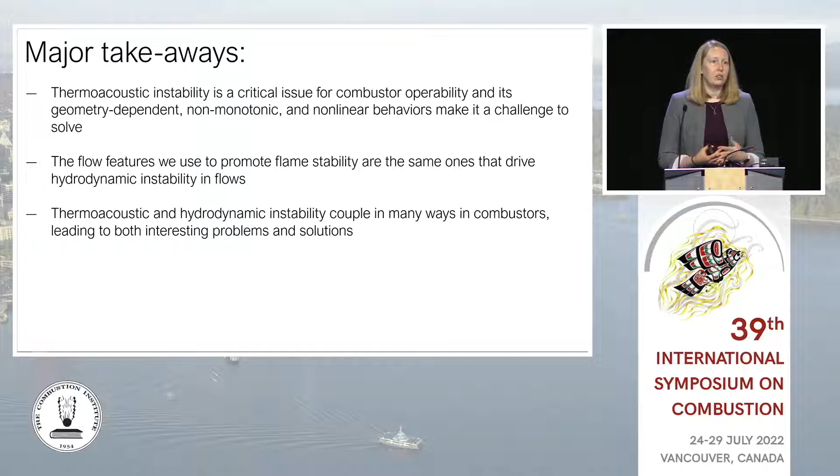And finally, this is a problem that obviously requires deep knowledge of fundamentals, but it also requires a knowledge of the technologies in which these instabilities occur. Thermoacoustics doesn't show up in the wild. It shows up in engines and devices that we have designed. And so knowledge of both the fundamentals and the application is really important.

That said, one of the other things I'll argue towards the end of the talk is that pretty basic theory that's computationally tractable has a real potential to reduce the likelihood of instabilities all the way in the design phase. All right. So let's get started.

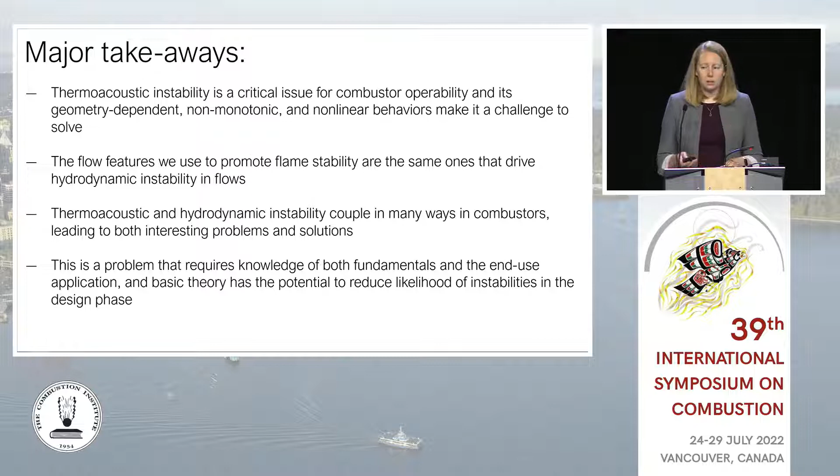So where does thermoacoustic instability occur? Basically, you can get thermoacoustic instability anytime you put a flame in a box. And as combustion engineers, that's what we tend to do, is put flames in chambers. And so this has the potential to occur pretty much anytime.

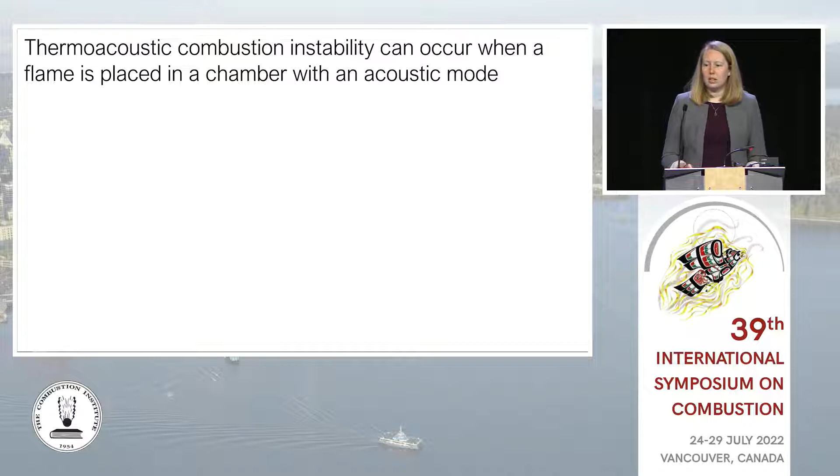So some examples of where we see thermoacoustic instability, probably the most famously is in rocket engines. This is the F1 rocket engine. Five of these were placed on the bottom of the Saturn V rocket that took us to the moon. And it has some famously intense instabilities.

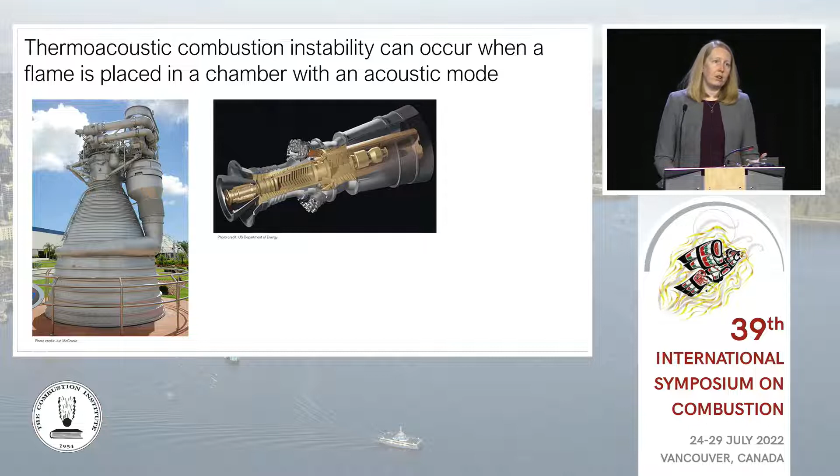Much of the work in thermoacoustics today focuses on low emissions gas turbines. All the tricks that we played to reduce the emissions, particularly the NOx from these engines, made them highly susceptible to thermoacoustic instability. And if you look across the modern literature, it's these two technologies that you'll see a lot of work focused on. However, thermoacoustics shows up in a lot of different places.

And one really interesting place is in big industrial systems, air heaters, package boilers, furnaces. Because these are really high heat rate devices, they can have really intense instabilities. But because they're so large, they tend to be really low frequency, on the order of tens of hertz.

And finally, you don't have to go to large industrial exotic technologies to find a thermoacoustic instability. You could just look in your basement. You can, in fact, get instabilities in gas-fired water heaters. So all the way from the lowly water heater to the mighty F1 engine, we have the potential for thermoacoustic instability, and a lot of the fundamentals that drive these instabilities are the same in this range of technologies.

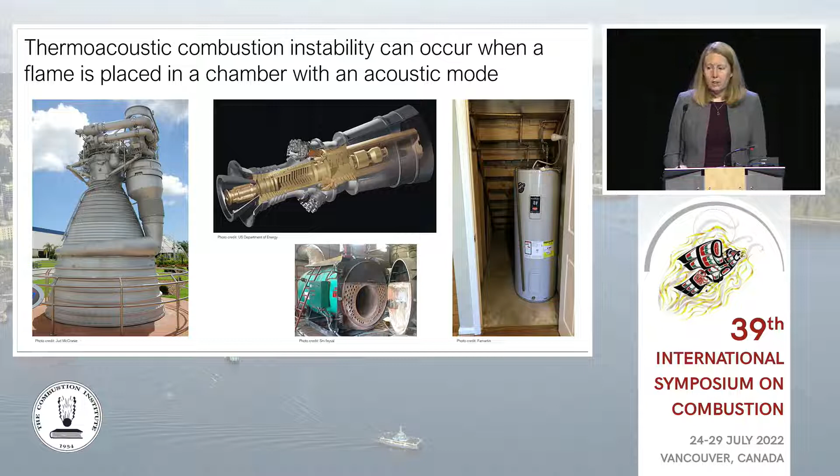So let's quickly talk about those fundamentals, and I have to give a lot of credit to yesterday's speaker for setting me up so well on this. But thermoacoustic instability is driven by a feedback between the heat release rate oscillations from the flame and acoustic oscillations inside the combustor, which include both oscillations in pressure and acoustic velocity. So let's break these down into their constituent pieces.

First, we'll talk about acoustic modes, knowing that many here may not be too familiar with acoustics. I'm going to assume that a combustor is a cylinder. Many of them are. Just as an example here, and as a three-dimensional object, you can get three components of an acoustic mode shape inside that device.

The first is the longitudinal mode, so I'm looking sort of on the side of this combustor, let's say flow's going from bottom to top, and I can get a resonant harmonic oscillation inside that combustor, fluctuations in both acoustic pressure and acoustic velocity as a result, where the fluctuations in both pressure and velocity oscillate in the direction of flow. And those are referred to as longitudinal modes.

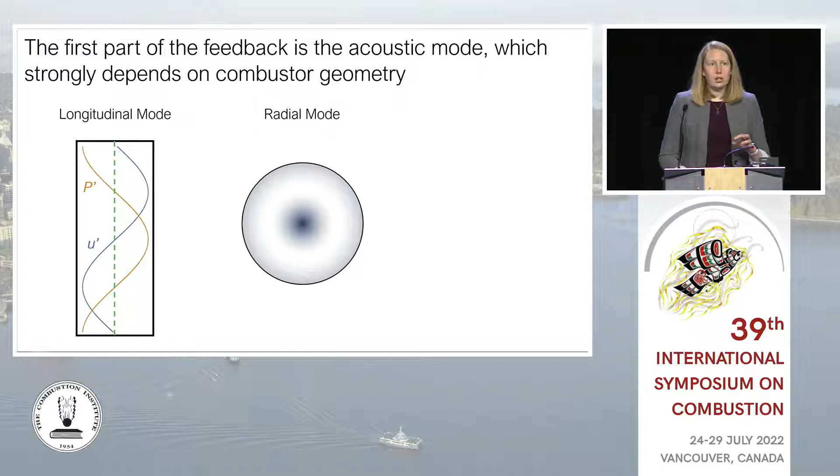If I turn that combustor on its end, I can also get fluctuations in the acoustic properties as a function of radius. We refer to these as radial modes. You can think of like hitting the top of a drum and the oscillations that emanate from there. And then finally, you have azimuthal modes. And so now you have pressure and velocity fluctuations in the theta direction.

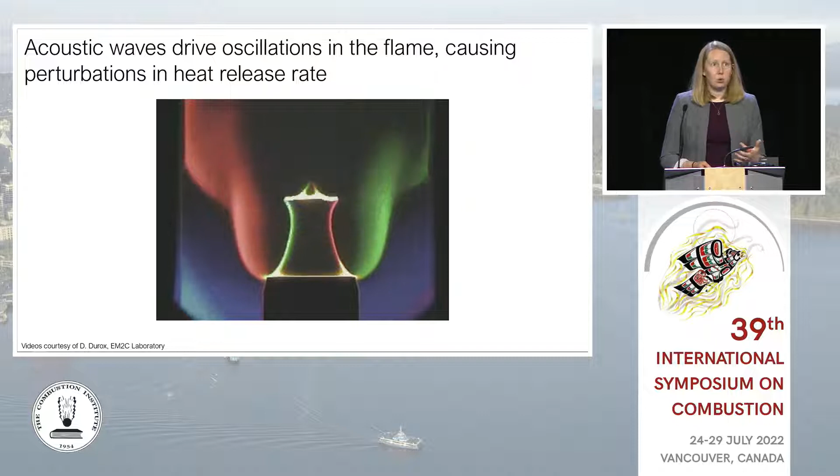The other part of this feedback loop is that flames are actually really sensitive to incoming perturbations. And so the movie that I'm going to show here is from Daniel Durox's EM2C. Here, this is just a laminar Bunsen flame, a high-speed Schlieren video. He's got a speaker at the bottom of the tube and is exciting the flame at 50 hertz. And what you can see is the very large wrinkles on the flame that are excited by the oscillations upstream of the flame that cause significant flame response and, as a result, heat release rate oscillations.

And so now to close the feedback loop, we have acoustic oscillations that can resonate inside the combustor. You have heat release rate oscillations from this highly sensitive flame. And if you think about heat release rate oscillations, this is a periodic expansion and contraction of the gas. This is just compression expansion work, or PdV work, that the flame does on the surrounding fluid. And this work can transfer energy from the flame into the acoustic mode, closing the feedback cycle, such that if all of this is happening relatively in phase, you can get a feedback and an instability.

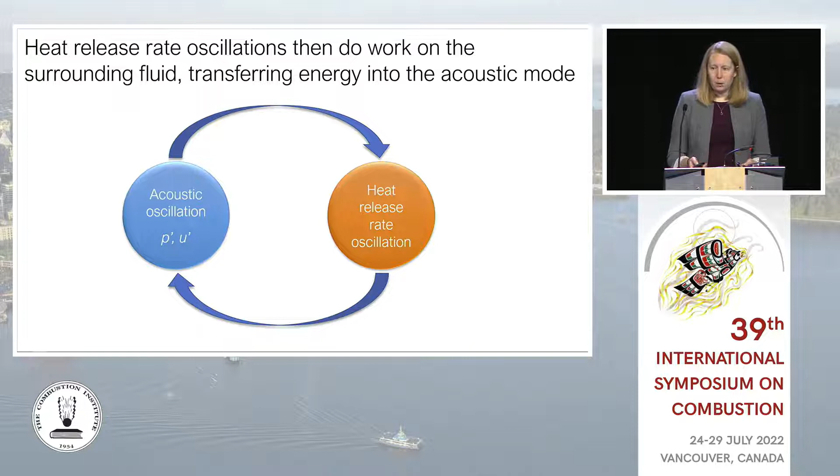Typically, however, there's more going on. And in between the acoustics and the flame heat release rate oscillations is something referred to as a coupling mechanism. In the paper that accompanies this talk, I talk about a whole bunch of different coupling mechanisms. But in this talk, I'm only going to focus on one, which is velocity coupling, or the excitation of the flow field by acoustics that then leads to the flame heat release rate oscillations.

We've known for quite some time that fluid mechanic coupling is really important for thermoacoustic oscillation. This is a picture from a classic study by Rogers and Marble that was published in 1956. This is a bluff body stabilized flame where flow is going from left to right. That triangle is the bluff body that the flame is stabilized on inside a relatively thin channel. And you can see from this Schlieren photograph that the flame is stabilized in the separating shear layer off the back of that bluff body.

They could operate this combustor in an unstable mode. And so this is what it looks like when it's unstable. They referred to this as screeching combustion. We still today refer to this as a screech mode. It's a really great word.

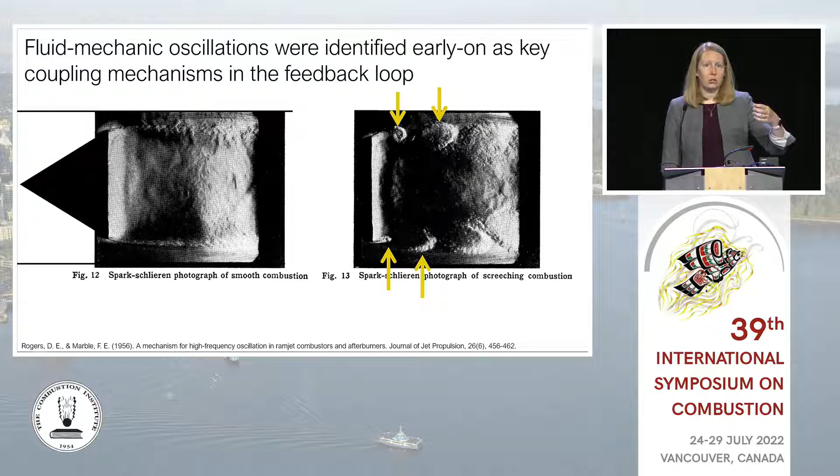And so what you can see from this Schlieren photograph is that there are large fluctuations on the flame that are causing these heat release rate oscillations. Although this isn't a direct velocity measurement, it doesn't take too much creativity to infer that these large oscillations on the flame are coming from vortices that roll up in the separating shear layers that are excited by the acoustics.

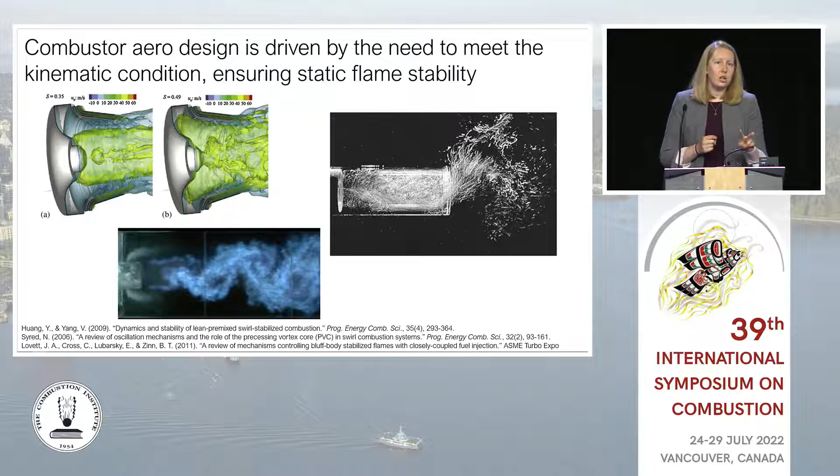And so in order to understand these fluid mechanic coupling mechanisms, we have to think a bit about what the flow field looks like inside a combustor. But combustors look very different for different applications. So here are a number of different examples from authors in the community of really different flow fields. But if you look across combustor technologies and sort of do your eigenvector decomposition of what flow fields look like, there are really two basic flow features that we use to stabilize flames in combustors. And they are shear and recirculation.

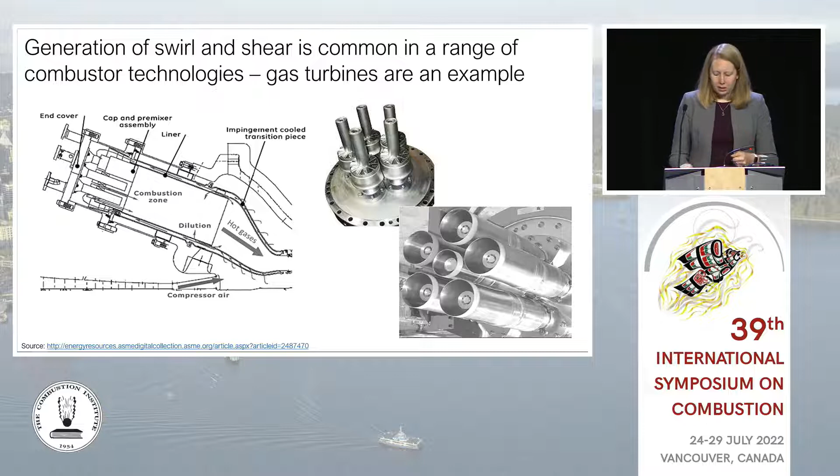The issue is that if you really looked at these pictures before, you'd notice that yes, we have a lot of regions of shear and recirculation, and that's great for static flame stabilization, but at the same time, it's exactly the actions of shear and recirculation that tend to promote hydrodynamic instability in these flow fields.

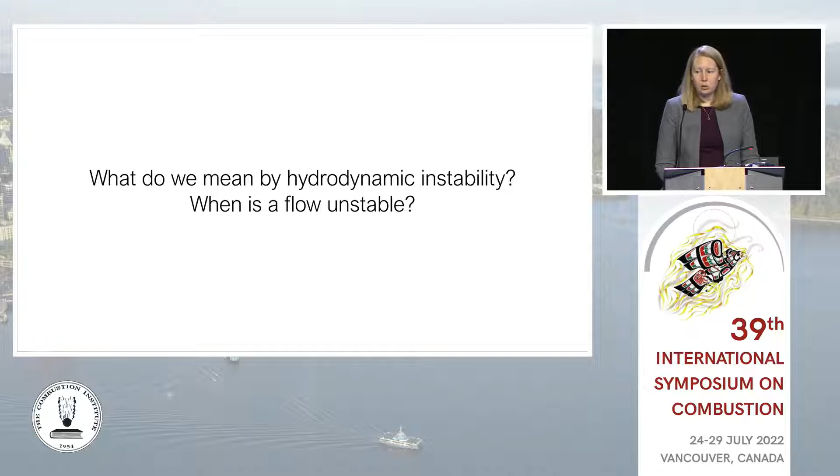So now I'm going to take a quick break and talk about hydrodynamic instability and give folks a little bit of a background, recognizing that this might not be something that folks are very familiar with, and talk about when a flow is unstable. So an unstable flow is one where an infinitesimally small disturbance to the flow will grow and propagate with the flow. And actually, I think to start talking about unstable flows, it first helps to talk about stable flows. And we're going to use some excellent PowerPoint art to make this point.

So a stable flow is one that, when disturbed, damps out the disturbance. So if I come upon a stable flow and I kick it, I will see some response, right? And so the flow oscillates because I've kicked it, but then as that disturbance convects downstream, the oscillations are damped out, both in space as it moves downstream and in time, such that if I came back to the flow a minute later, I wouldn't see any other oscillations. So this is a stable flow.

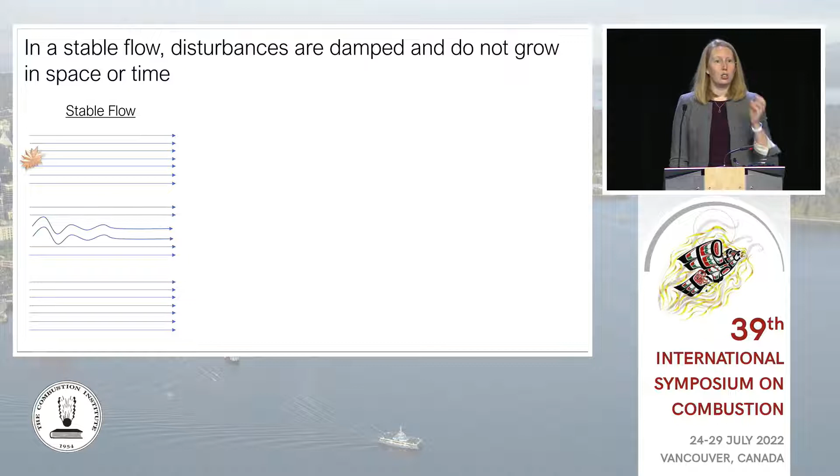There are two types of unstable flows, and I'm going to give this explanation from a very high level. Again, I would point you to the paper for a much more subtle discussion of flow instability, but they generally fall into two categories. The first category are disturbance amplifiers. So some flows, if I kick them, actually amplify the disturbance.

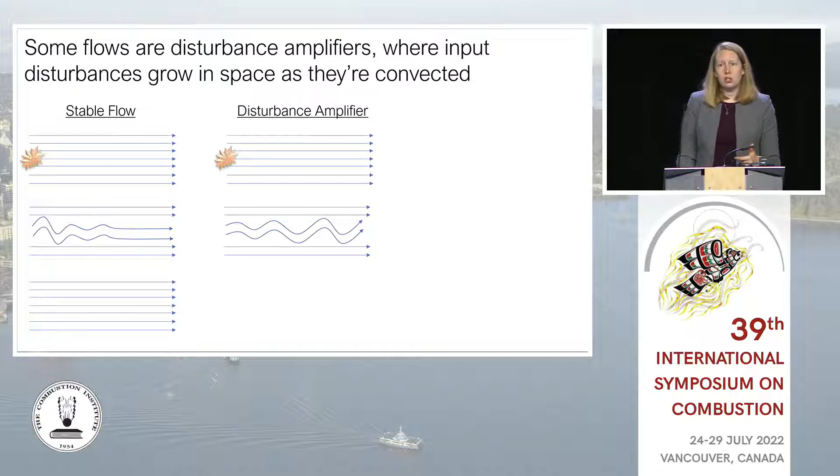And so after I poke the flow, I see an oscillation, and if I watch that oscillation as it convected downstream, it would oscillate, typically harmonically, and it would grow in space. However, flows that are disturbance amplifiers don't keep it going, and so if I came back a minute later, I wouldn't see any more oscillations because that disturbance convected away with the flow.

You may ask yourself at this juncture, and it's the right question to ask, what happens when I come upon my globally unstable flow and then I punch it? And the answer is it's not entirely clear, and we're going to talk about this at the end of the presentation.

Also, emojis are what happens when you ask a millennial to give a plenary lecture.

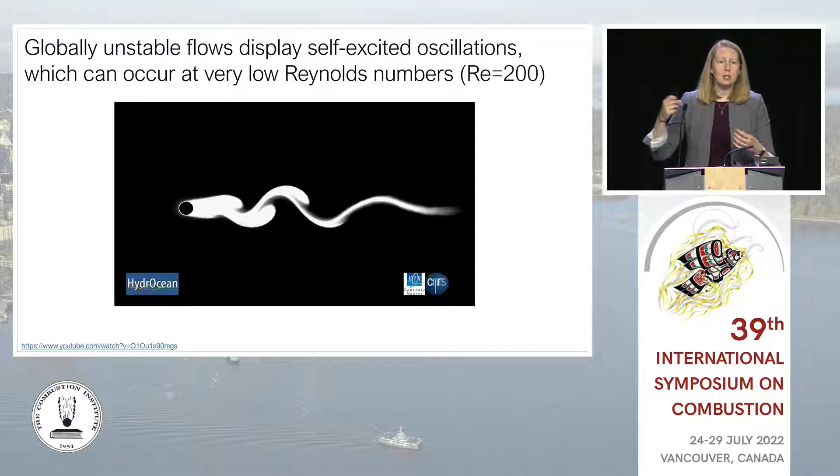Globally unstable flows, a good example, actually one of my favorite examples, is the flow behind a wake. So this is a video that shows a wake flow at a Reynolds number of 200. At the beginning of the simulation, you had a perfectly quiescent flow heading to this bluff body from left to right. But because this is a self-excited oscillator, it's globally unstable, you get this absolutely gorgeous asymmetric vortex roll-up in the wake, which is referred to as the Bénard–von Kármán vortex street.

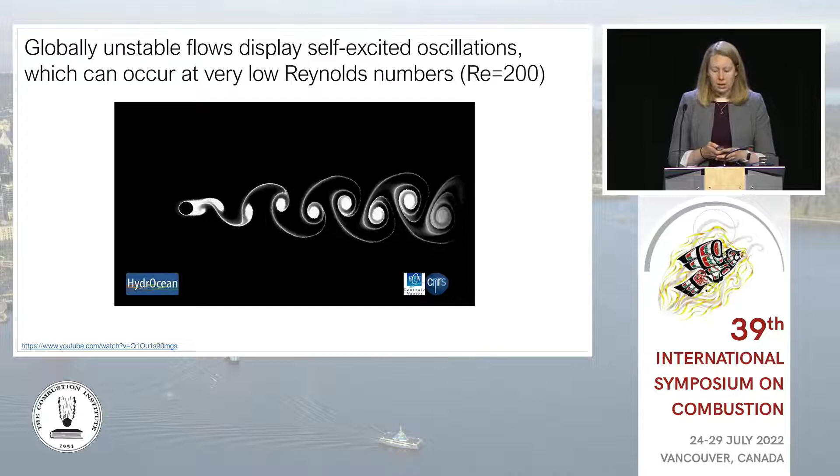This instability arises at Reynolds numbers as low as 47, so you really don't need any, theoretically, incoming perturbation in order to get this instability to occur because this flow is self-excited. So now if we go back to our two combustor flows, right, we use wakes and we use swirling flows in order to help stabilize flames.

Each of those two combustor flows has their own global instability. So the first one is this wake instability or von Kármán vortex street. So this video is from my colleague Ben Emerson at Georgia Tech. This is a bluff body stabilized flame, and every once in a while you'll see a really nice asymmetric oscillation in the wake, and I'll talk about why it's only happening every once in a while later in the presentation.

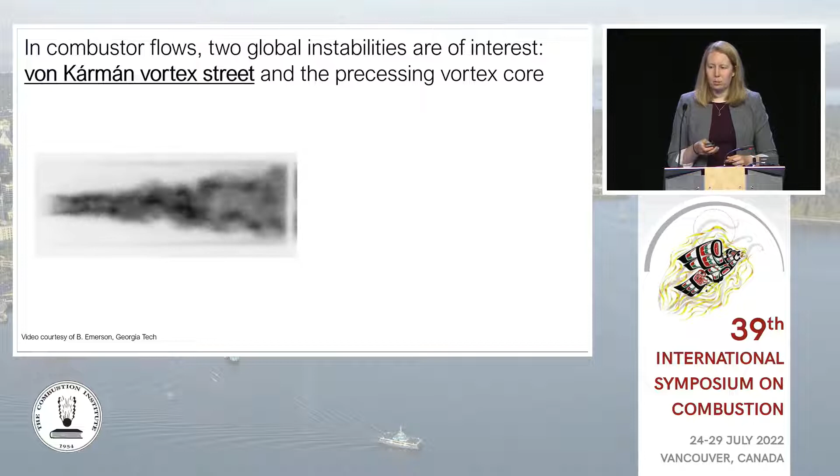The other one in swirling flows is referred to as the precessing vortex core. So the precessing vortex core is what happens when that vortex breakdown region in the middle of the flow precesses around the center line, and you get this massive oscillator that forces the flow in a helical motion.

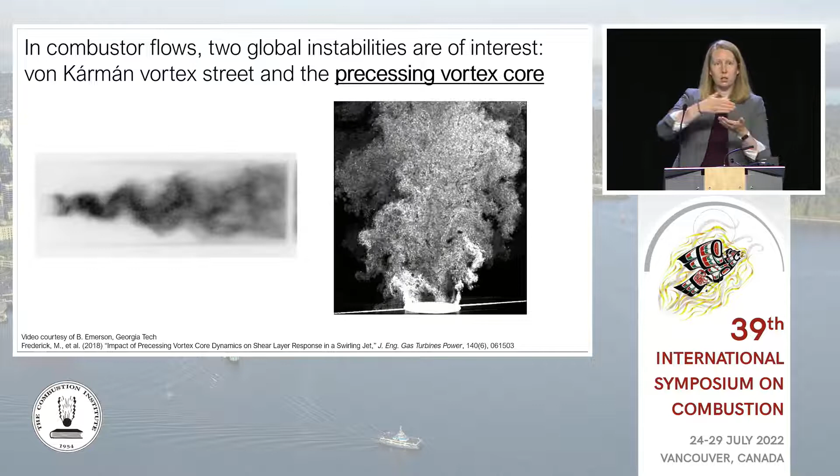And so this is a high-speed particle image velocimetry video that was taken by an undergrad in my lab, Mark Frederick, who is here this week as a graduate student. And so we have seeding particles, the laser coming through, and you can see the pretty violent oscillation of the shear layers as they respond to this precessing vortex core in the center.

So that was just talking about non-reacting flows, but you can get some really interesting behavior when you add a flame. So the presence of a flame can significantly impact the behavior, particularly of globally unstable flows. And so to show this, I want to highlight a study from Rob Erickson and Marios Soteriou, where they looked at a wake flow and a flame stabilized in the wake flow.

So on the left side of this figure is instantaneous vorticity. On the right, the top is time average vorticity, the bottom is time average temperature. And we're going to start at the lowest picture. What they did basically was they changed the temperature ratio across the flame, so burnt temperature over unburnt temperature. And as you can see, when that's equal to 1, or you have no flame, you get that really nice asymmetric von Kármán vortex street, which is what we would expect.

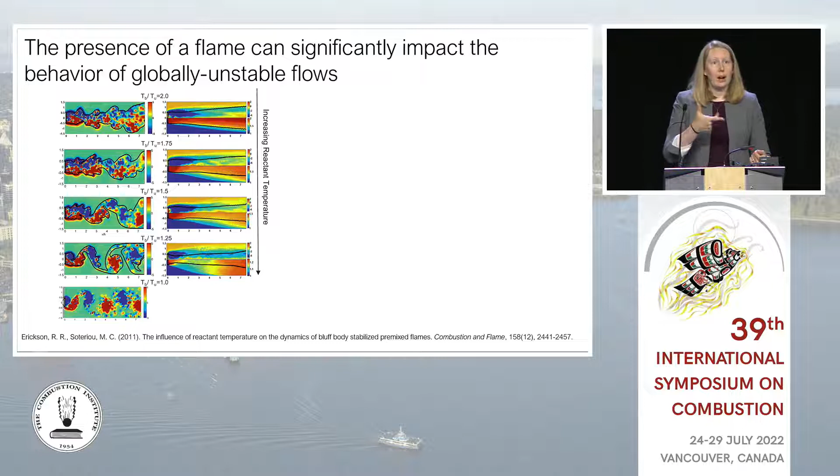So then you add a flame, and at low temperature ratios, the black line, which is the flame, follows that oscillation really nicely. But as we start to crank up the heat release, so the temperature ratio across the flame, it actually suppresses the global instability. And you can predict this using theory, which we'll talk about later. You can also use a baroclinic torque argument and kind of right-hand rule it to show how the vorticity is being suppressed by the density gradient across the flame.

So if we looked at this, again, in movie form, the parameter that actually matters is not the temperature ratio, it's the density ratio. So in Ben Emerson's work, again on the right, low density ratio, you get every once in a while that nice asymmetric vortex shedding. But if we have a low density wake or a higher heat release, we get absolutely no asymmetric motion. It's just a turbulent flame brush. And so the flame really can affect the global instability in the flow field.

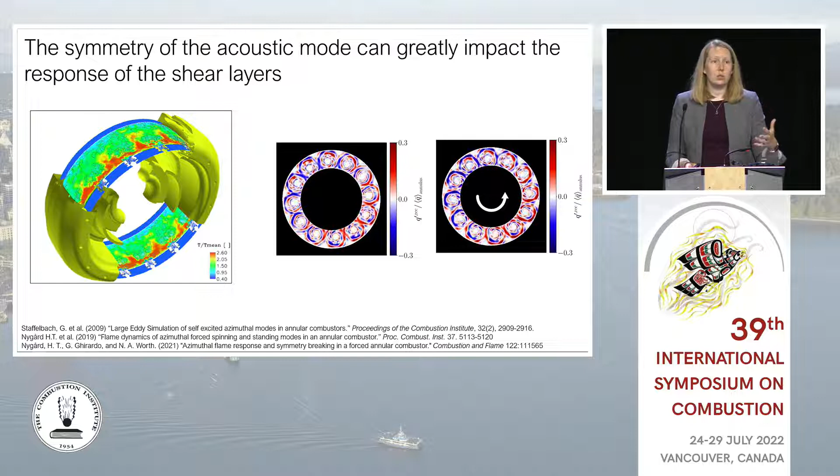So not only are these disturbance amplifying flows sensitive to the frequency of forcing, but they're also really sensitive to the symmetry of forcing. And this can have some major implications for the global heat release rate oscillation. You get a finite global heat release rate oscillation from a symmetric forcing, but in many cases you can get no global heat release rate response from the asymmetric case. So this flame can be violently shimmying around but there's no global heat release rate oscillation, which is important for that thermoacoustic feedback loop.

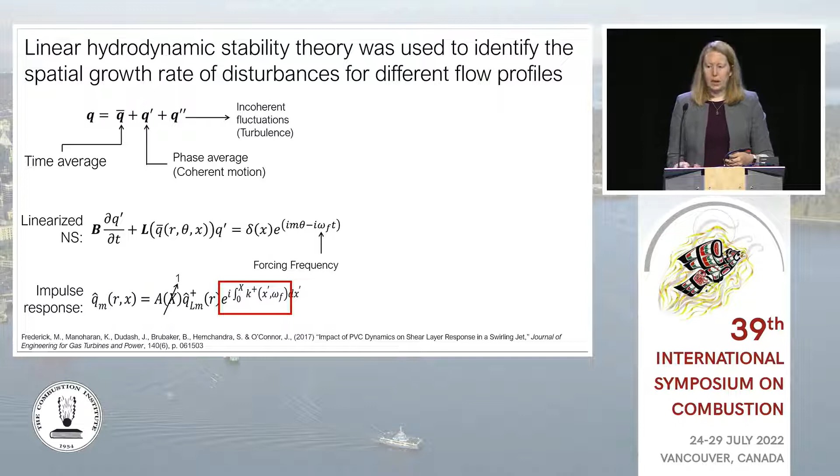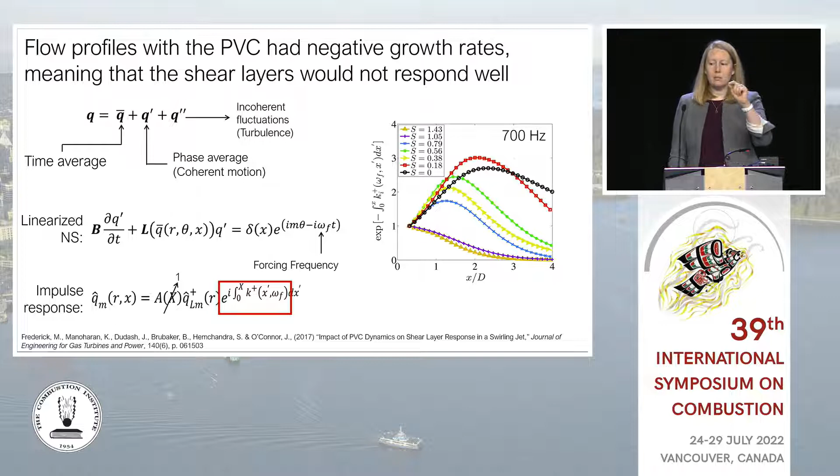And so Mark Frederick had presented this work at Turbo Expo, and we got a really good question that was like, you just did this at 1 frequency, maybe you just chose a really good frequency. So this is why peer review and question time is good. So we went back and we did this at all the frequencies, and we chose the maximum value of this across the flow field and plotted it now as a function of frequency, or Strouhal number, which is a non-dimensional frequency. And you can see for a whole range of frequencies, we get the same thing.

So this was really cool, because when we hypothesized this at the end of the paper, we say, look, we have used a global instability to suppress this receptivity of the shear layer, which if we could do this in a reacting flow, this was all non-reacting, we could break the thermoacoustic feedback loop, because now the shear layer is no longer amplifying any disturbances. We didn't take it any further, though.

But somebody else did, and so Kilian Oberleitner's group at TU Berlin actually showed this many years later in a reacting flow, and it's always really wonderful to see your theories being proved out by colleagues in completely different experiments. So this is a real possibility that you can sort of manipulate the stability of the flow to help suppress thermoacoustics. There was an issue, though, with how we did this. This is a sort of simplified problem.

And in particular, when you have these global instabilities interacting with thermoacoustic instabilities, often the interaction is not linear, it's nonlinear. And so the last thing I want to talk about is this interaction between thermoacoustic and hydrodynamic instabilities, and particularly instabilities that are globally unstable and the potential for nonlinearity in the interaction. When you have nonlinearity in flows, it opens up a whole bunch of different options. Nonlinearity is just a wonderful field of complex results.

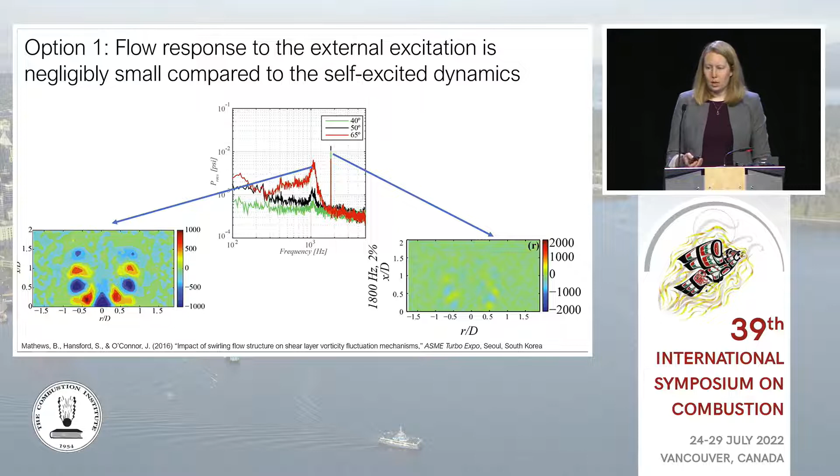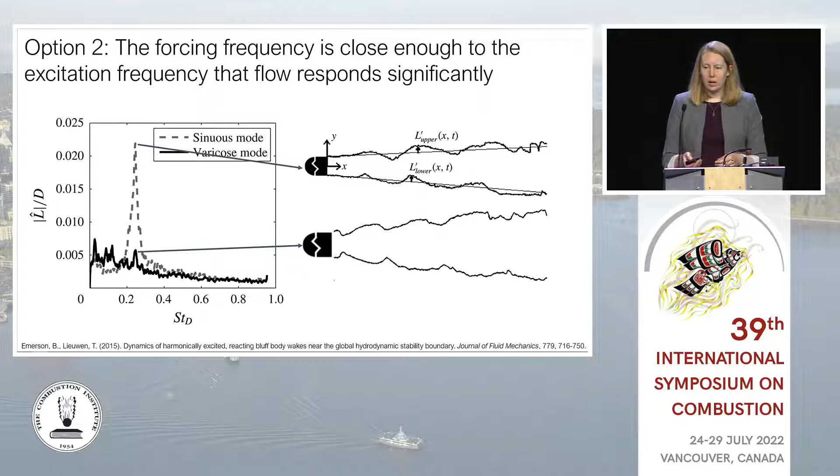I'm going to only highlight a couple things about this paper. This is an extremely subtle study, and I would encourage you to read it if you find this interesting. But basically, without acoustic forcing, at the density ratio that they're running this experiment, you see this nice oscillation at the expected Strouhal number of about 0.25. So then what they did was they took acoustic forcing, it was longitudinal acoustic forcing, and they swept across that frequency. And what they saw was when you forced at the natural instability frequency, you got this massive response.

So really, really susceptible to forcing, huge amplification of the input, because now you're forcing something that's already self-excited. And this can cause potential issues for thermoacoustic systems if you have an acoustic mode that lines up with one of these hydrodynamic modes. The final thing is that you can have these weird nonlinear behaviors in coupling between the hydrodynamic mode and the thermoacoustic mode, and there are a few different options.

So some examples that folks have found in the literature. First is a study that was done at DLR, so Adam Steinberg, Isaac Boxx, Michael Stöhr, Cam Carter, and Wolfgang Meier. They had a situation where instead of what happened in our experiment, where the PVC suppressed the thermoacoustics, the PVC and the thermoacoustics existed together, and they interacted. And so the thermoacoustic oscillation sort of caused this breathing in the PVC, and the PVC created this weird tilting in the flame. But these two things were happening on top of each other, and there's some really neat data analysis in the paper to kind of pick apart how these two different motions and turbulence are impacting the flame.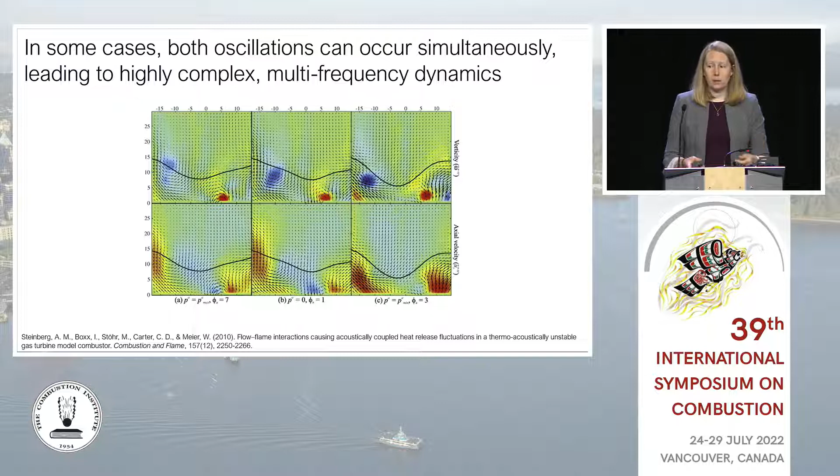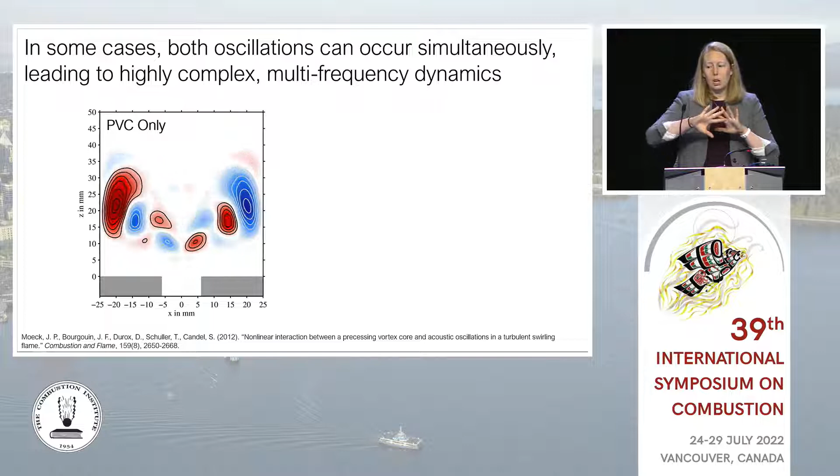The other thing that can happen is you can not just get dynamics at the frequency of the PVC and the frequency of the thermoacoustics, but nonlinear phenomena create all these other frequencies. They're called sum and difference frequencies or interaction frequencies. So this is work that Jonas Moeck did during his PhD at École Centrale, and here he's showing oscillations due to the PVC only, but in cases where you had both the PVC and some acoustic mode, you could get these really strong interaction modes or sum and difference frequencies, which are classic examples of nonlinear behavior that showed up really strongly in the flame.

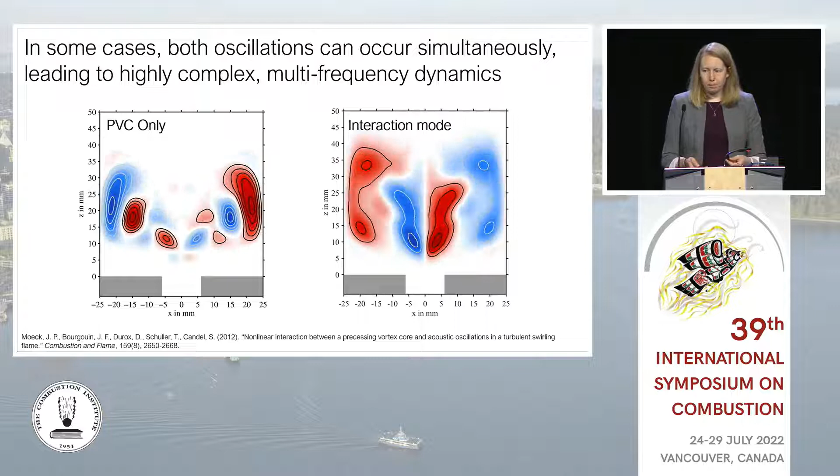The final example that I want to show is one that just got accepted to the Journal of Fluid Mechanics a couple weeks ago. This is a collaboration between my group and my soon-to-be former student, Ashwini Karmarkar. She just defended her PhD 2 weeks ago. Isaac Boxx at DLR, and then Santosh Hemchandra and his grad student, Sarthak Gupta at IISc. Here we're taking data from one of Isaac's experiments.

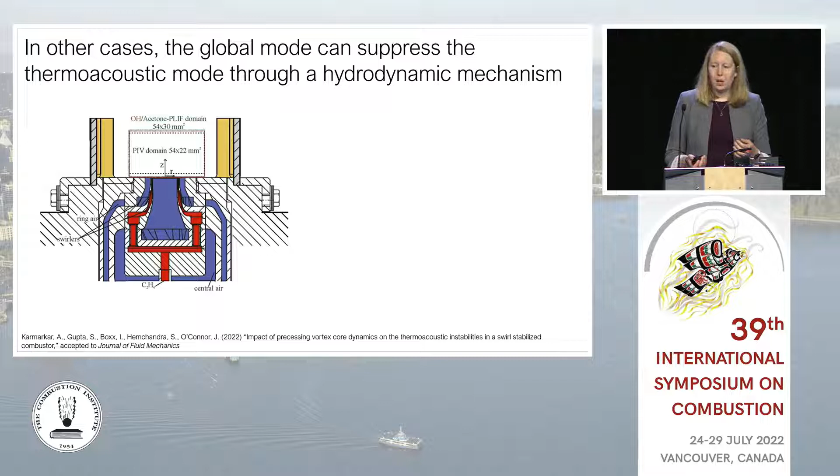It's a dual swirl injector where we can keep the total flow rate constant but split it between an outer swirler and an inner swirler. And in true DLR fashion, there are like tons of lasers and cameras. We're measuring stereo PIV, OH PLIF for the flame, and acetone PLIF for the fuel. And so as we look at these different air splits, if you put 20% of the flow through the center nozzle, the remaining 80% through the outside, what you're seeing is a high-speed video. In the red is the OH PLIF, in the green is the acetone PLIF, and you get this massive symmetric oscillation. This is a thermoacoustic mode, we could tell again with the pressure, as a result of the acoustic oscillations in the rig. So really strong thermoacoustics.

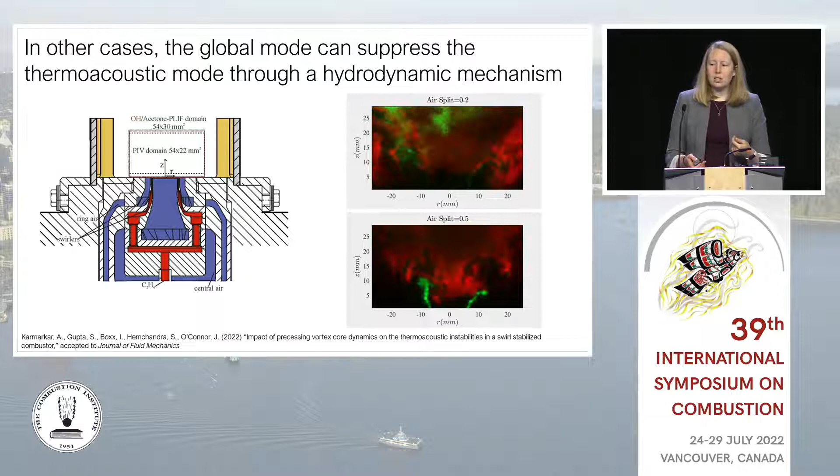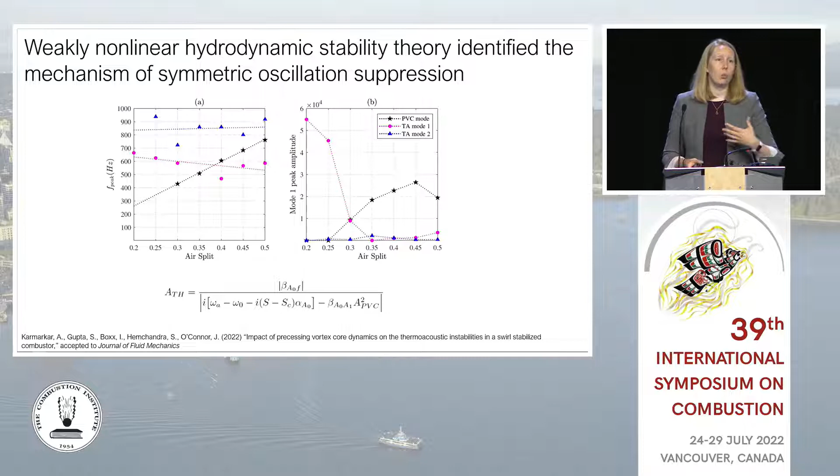But if you read each of the terms in there, you can actually see the mechanism by which the PVC is suppressing the symmetric response and hence the thermoacoustics. And so now we have theory to show us why we're getting this particular response.

All right. So in the last few minutes here, I just want to talk about what this means for design. Hopefully I've showed you at this point that there are lots of really interesting ways that thermoacoustics and hydrodynamic instability can interact. You have these disturbance amplifying flows that can really drive the instability. You have these globally unstable flows that can cause all these weird nonlinear behaviors. But now what do we do with all this information?

Well, if we think about how we design engines, and I'm using gas turbines here as an example because that's my main home, but I think this pretty much applies across the board. Current combustor design methodology sort of has three basic steps. So you start with your current design and then you use design tools. And these design tools are empirical, curve fits, maybe 1D models, some old guy in the group who nobody let retire because he knows everything, right?

So you get a baseline design from these tools, and then you take the baseline design and you put it into CFD, and I would highly recommend folks go back to Thierry Poinsot's 2016 plenary lecture at this conference in South Korea, where he talked about how we're really improving CFD tools for capturing thermoacoustics in design. But depending on how much computing power you have, this can be RANS all the way up to LES.

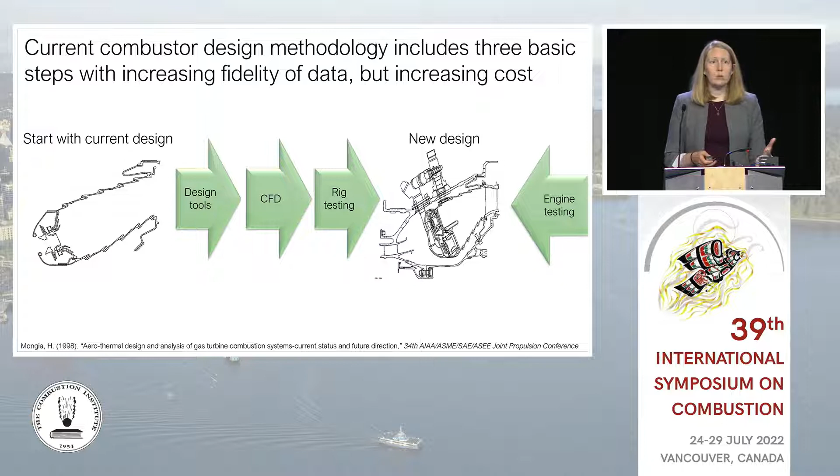And then you have a part, you prototype it, and then you rig test it, and you test it and test it until you're pretty confident that it's going to be okay. And then you can put it in an engine for an engine test and then send it out. So where do we typically find thermoacoustic instability in this design path? Well, if you're really lucky, you find it in the CFD stage. But you need to be doing some pretty high fidelity CFD, particularly capturing the acoustics, in order to do that. Again, see Thierry Poinsot's lecture for that particular issue.

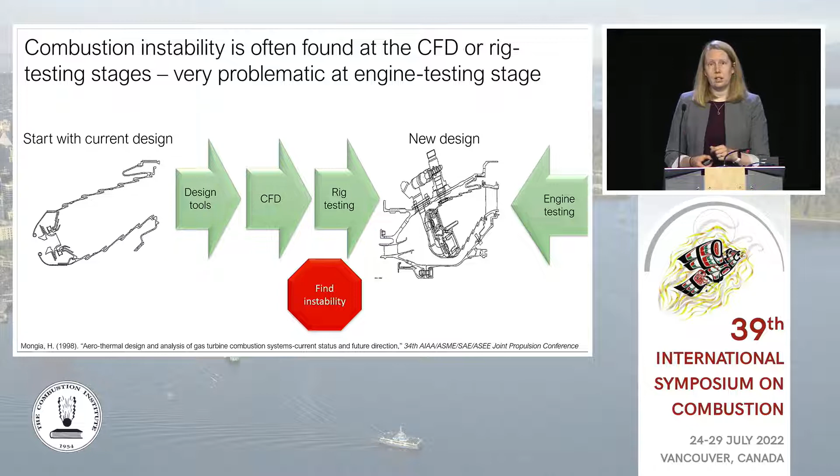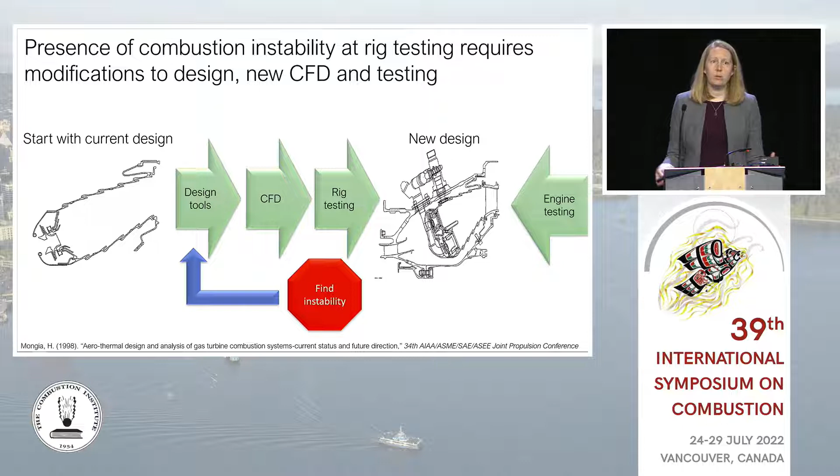Where you mostly find it is in rig testing. And it's kind of a pain because you've already built a thing, you've got a rig, and now you got to go back and you got to redesign it and you got to try it again. And it gets expensive and time consuming, but at least you found it in the rig. If you're having a bad day, you find it in an engine test, right?

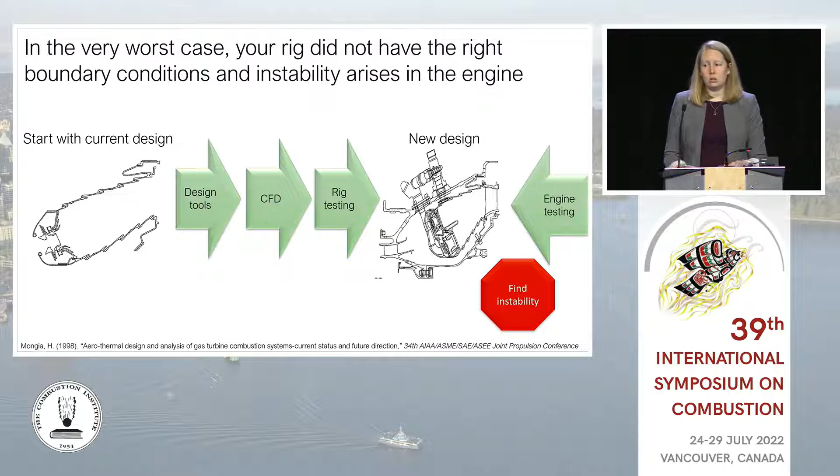Because now you've got this part that you've interfaced with all these other parts in the engine, and it can be really bad. If you're having an extra bad day, you find it on an engine installation, and you never caught it in test. And this happens more regularly than you think it should, because these instabilities are so geometry dependent. You know, it can depend on the fuel skid that you're using to run your engine. So the question is, how do we try to avoid this?

Well, the first thing is that there are thermoacoustic instability prediction tools. And so they come in a couple different flavors. Some of them are Helmholtz solvers with flame models. We have these things called network acoustic models, and I've put some names of some folks, and I'm sure there are many others who are developing these really nice types of tools.

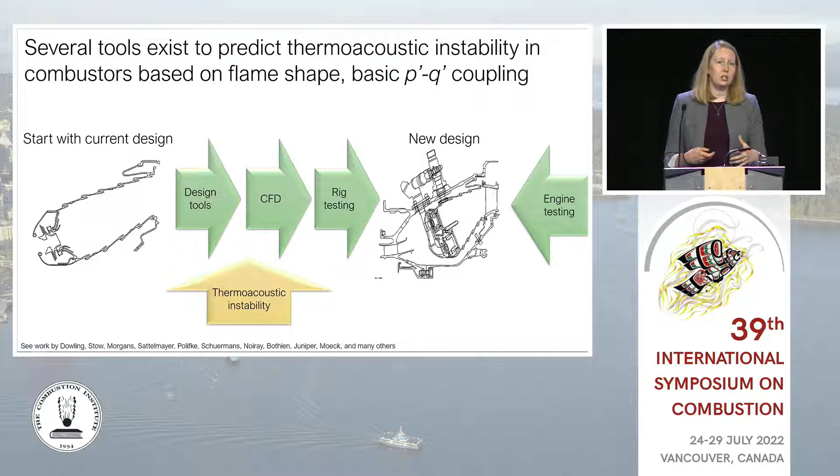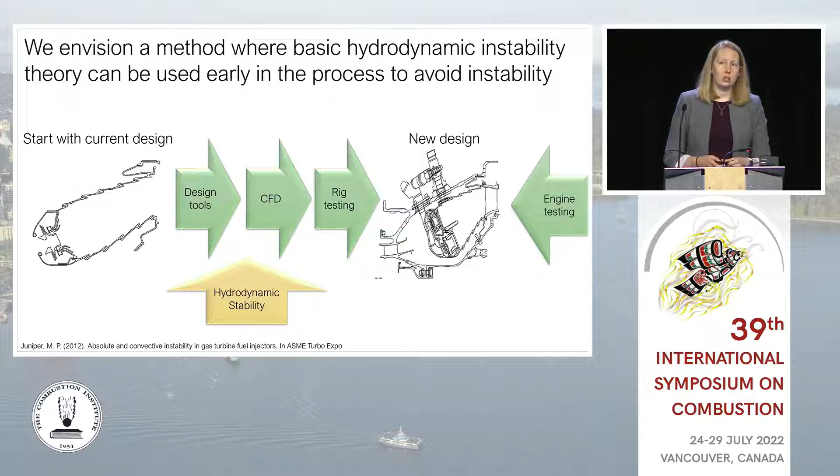But what I'm proposing is that we also add this hydrodynamic stability theory to this design loop, knowing that these types of thermoacoustic tools don't capture all the rich dynamics of the flow field in addition to the thermoacoustics. We need another tool. And it turns out that this stability theory is highly tractable and not all that computationally intensive. And it can allow us not only to catch these instabilities, but also potentially design in some of these tricky nonlinear interactions that would allow us to suppress thermoacoustics.